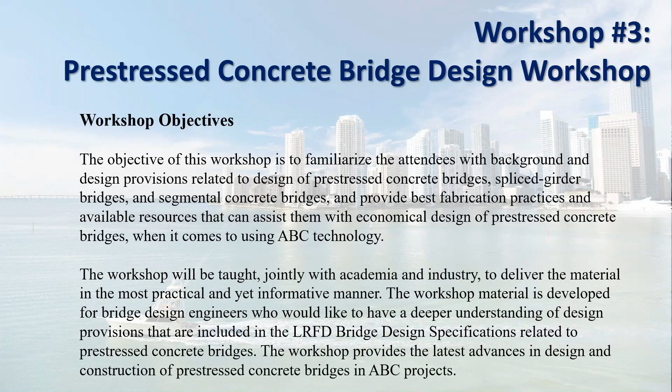As an example, the pre-stressed concrete bridge design workshop has four different sections. The analysis and design, Dr. Bijan Khaleghi will cover in detail the AASHTO LRFD bridge design specification related to pre-stressed concrete design. We will have William Nickas covering the fabrication of the pre-stressed concrete bridge. Gregg Freeby is going to be discussing segmental bridge design and construction, and then there will also be a module on available analysis tools.

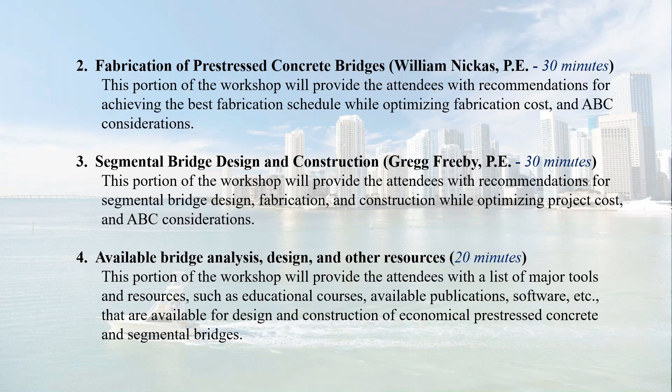So far, we have about 40 exhibitors in the conference, but there's still space, so it's a very good opportunity to showcase your products and services to bridge owners, consultants, and attendees. If you are thinking about exhibiting, there are still booths available. You can go to our website and reserve your booth. We hope to see many of you in December in Miami, Florida. The conference will be held at the Hyatt Regency Hotel.

Our presentation today features the Alaska Department of Transportation and Public Facilities' use of ABC to address climate change on behalf of a remote village north of the Arctic Circle. We'd like to thank Rich Pratt, former Chief Bridge Engineer with the Alaska DOT&PF, for coordinating this presentation. We're pleased to welcome our presenters, Elmer Marx, Acting Chief Bridge Engineer with the Alaska DOT&PF, and Nicholas Murray, Bridge Engineer also with the Alaska DOT&PF. I'd also like to introduce our Q&A session moderators, Paul Liles, formerly Georgia State Bridge Engineer, and Don Diggeman, current Georgia State Bridge Engineer. We'll now begin our featured presentation.

Thank you, Mary Lou, and welcome everyone from across the nation. You have to admit, it's pretty cool that Atarod is in Miami and Nick and I are here in Juneau, Alaska, the other side of the country. So, modern technology at work. Thanks for that.

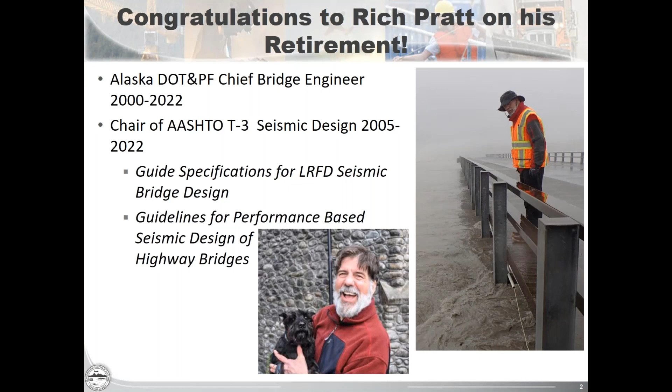I'll start today by speaking sort of globally about Alaska's use of ABC.

Consequently, Alaska has sort of been using ABC since before it was called ABC, before it was cool like it is now. The reason is these remote locations are difficult to access. Many have no road access, so we either need to fly in the pieces, barge in the pieces, or use ice roads in the winter to transport the pieces. That's pretty challenging. Further, our winter months are pretty long. In Alaska, they say our seasons are almost winter, winter, still winter, and construction.

So that doesn't leave us much time to work. We don't have a lot of warm weather. Plus, in Alaska, the daylight hours get very short in the winter months and much longer in the summer. Oftentimes our construction season is limited to between 3 and 5 months to get a bridge built, and we prefer to have our bridges built in that single construction season.

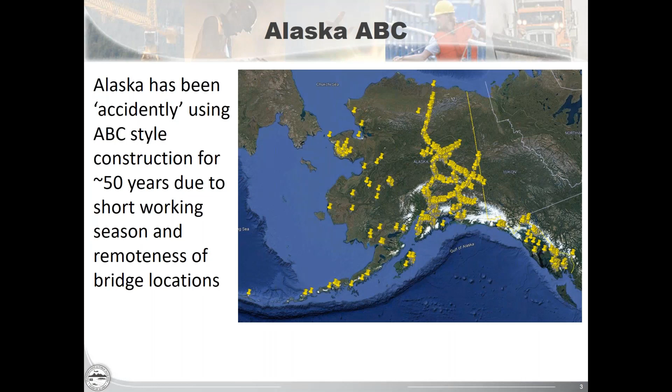One of the most popular superstructure types we use in Alaska is the decked bulb T. We've been using that structure type since about 1973, and it represents a pretty large part of our inventory at this time—our deck bulb T girder bridges are used throughout the state. For us, they are the low-cost solution. If you can get a deck bulb T to work at your site, if it meets the geometric requirements and so forth, it will almost certainly be the least expensive option.

For our substructure, a very common system for us is concrete-filled steel pipe pile extension bents. That's quite a mouthful, but they're just concrete-filled steel pipes that support a cast-in-place or mostly cast-in-place concrete cap beam, which in turn supports pre-stressed girders or structural steel girders or other superstructure types. These are galvanized steel pipes, galvanized from the top of the pipe to 10 feet below the final ground line. That's to address corrosion—once you get about 10 feet below that final ground line, there's a lack of oxygen, so corrosion is pretty much cut off.

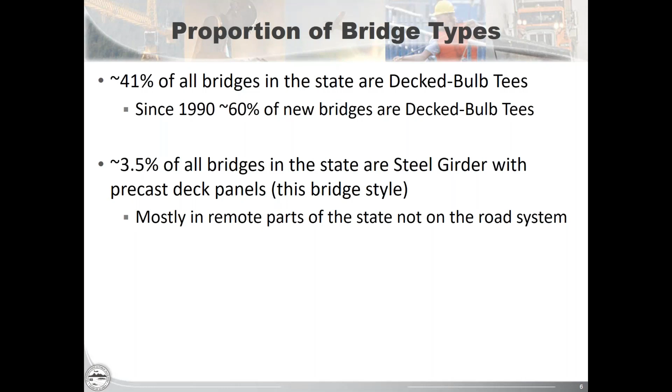So the bridge that Nick is going to talk to you about next has no road access. You can fly in a small plane, though it doesn't have 747 capability. Or you can barge in, barging out of Nome, the closest community. With that, I'll introduce Nick Murray, an engineer with us here at the Alaska DOT Bridge Office. He's been with us over 10 years, maybe 11 or 12 even, and has done a lot of our more challenging work. So with that, Nick, it's over to you.

Because it's on the ocean, the temperatures are not quite as extreme as you'd expect - it's kind of regulated by that. That being said, there are still very low lows, but in general it hovers right around or just below freezing. Something else to point out is that this area has been inhabited for about 1,500 years or so.

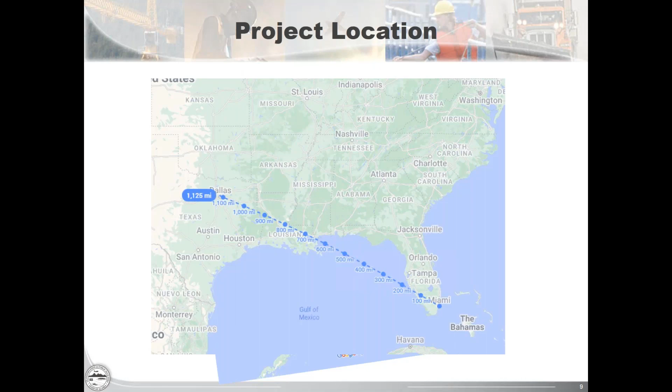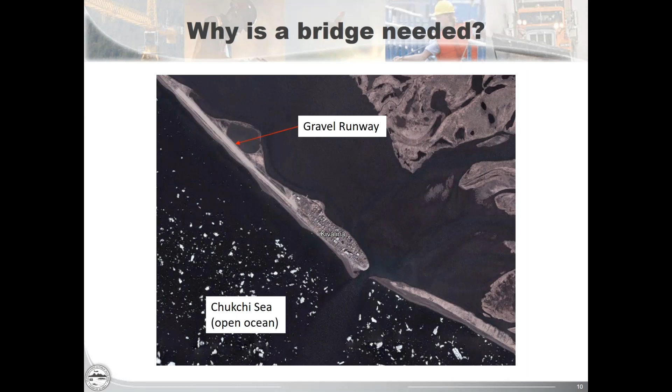If I zoom in a little more, this is the entirety of the town - there's no suburbs to this, it is it. Every person you see lives in town, and you can kind of get a sneak peek of where this is going. If you look around here, this entire southern east portion of the island is armored. That was a U.S. Army Corps project that went on in the early 2010s.

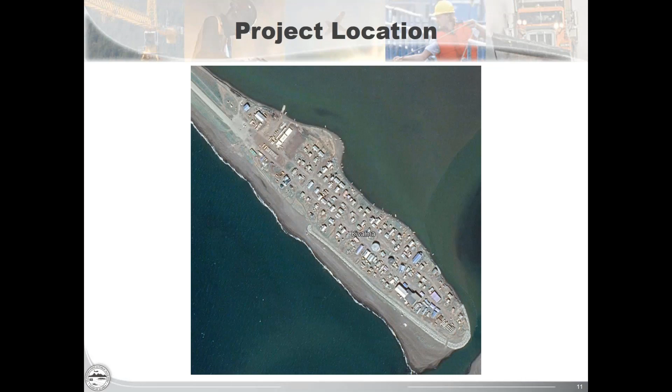So why is a bridge needed, and where is a bridge going? The villages up in this part of the area are protected by the sea ice. I know that seems counterintuitive, but the sea ice provides a big damper to any storms that come in from the Arctic Ocean and the Western Pacific, typhoons in particular. As sea levels have risen and temperatures have increased, that sea ice is becoming less and less reliable.

It's showing up later in the year and dispersing earlier in the year, so even compared to a few decades ago, that sea ice is not providing the buffer that traditionally had been there. You look at this picture and think, oh, that's a lot of sea ice, but this is in June. Traditionally there would only be open ocean for maybe two months of the year that Kivalina was actually exposed to open ocean, and the rest of the time it's protected by it.

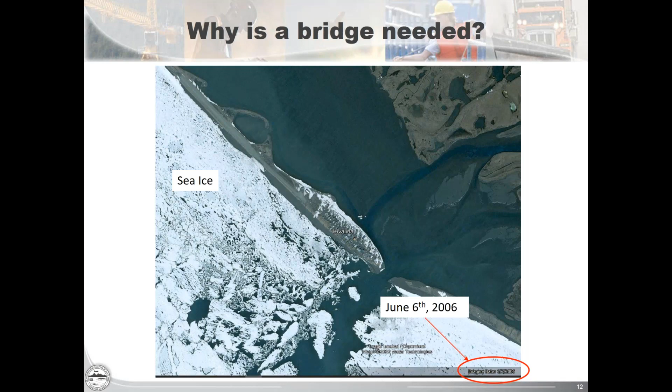If I take one step further back, what you'll see is that it's not just a little bit of sea ice. There's approximately 50 to 100 miles of sea ice between open ocean and the village, which gives you some sense of just how much protection that is. When it freezes 10, 15 feet thick, it's acting essentially like another landmass protecting the village.

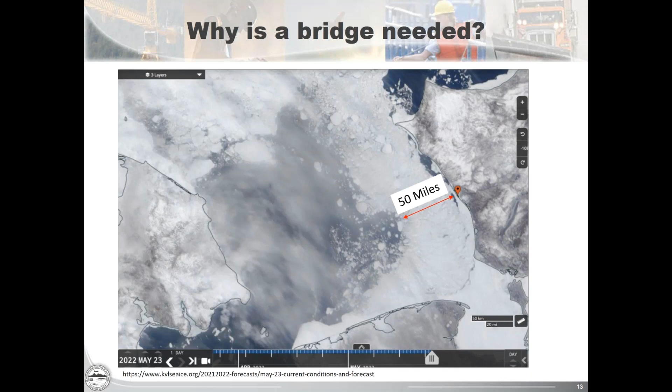One other thing I'll point out is that these two islands down here are the Diomede Islands, so yes, you can see Russia from parts of the US.

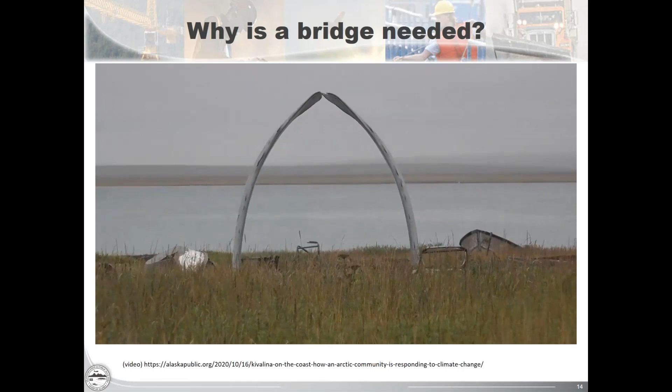This basically points out that large portions of the beach have been lost in recent years. You can see there's no trees in the area, and the sea ice you can see is broken up and not as firm as it would have been.

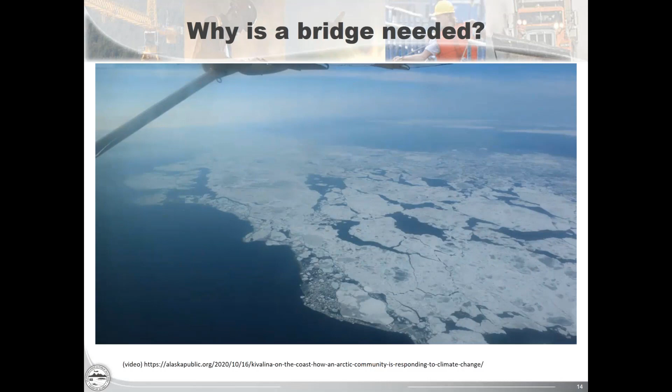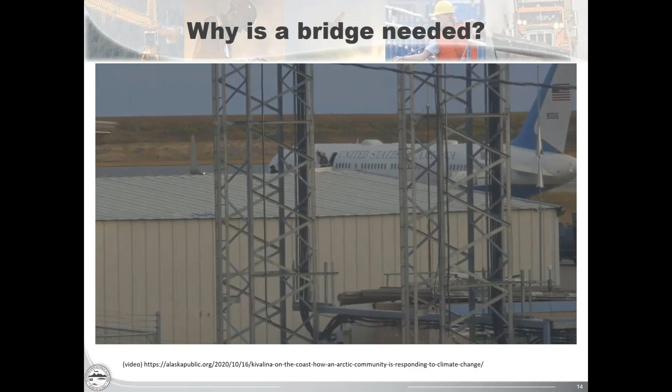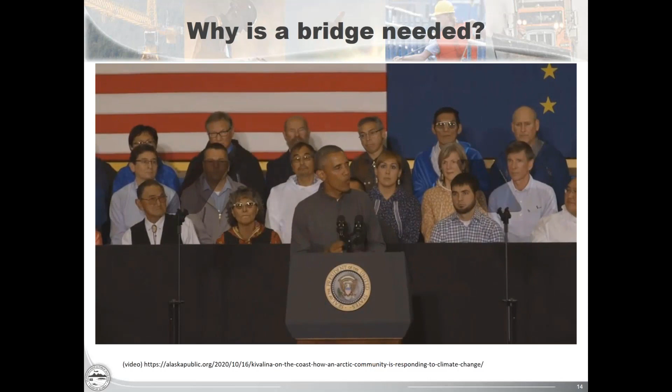A kind of unique fact is that about eight years ago, President Obama became the first sitting president to visit the Arctic, and he actually flew over the village of Kivalina in Air Force One. It's kind of a big deal for a village of only 450 some odd people, and he pledged $2 million to support voluntary relocation efforts.

That's the former governor he's speaking with right there. They estimate, though, that we'll need about 100 times that much to relocate these villages.

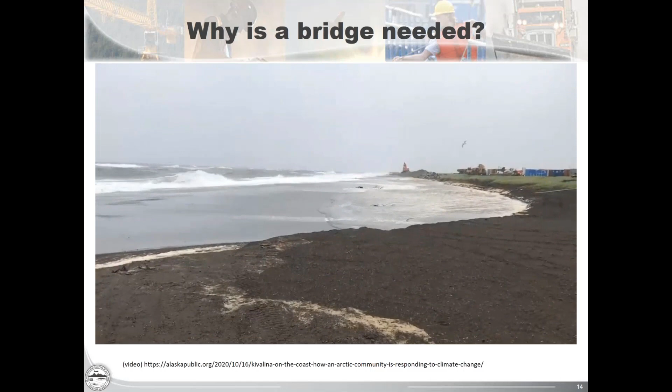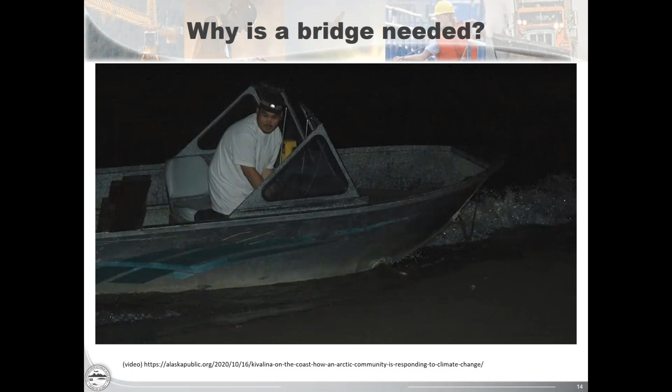In 2007, there was another big storm that came through, and you can see they're trying to quickly armor it. Because the village is so low-lying, half the community ended up having to evacuate. The young children and the elders were able to fly out, but a lot of the other people just had to take small boats across to the mainland. If you look back at those pictures I showed earlier, there's not a town on the other side, so they're just kind of going to open land.

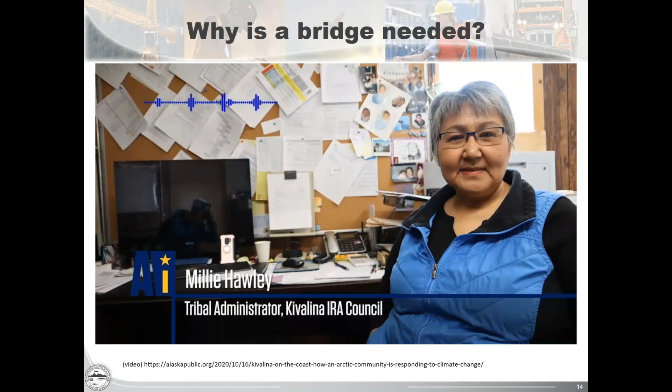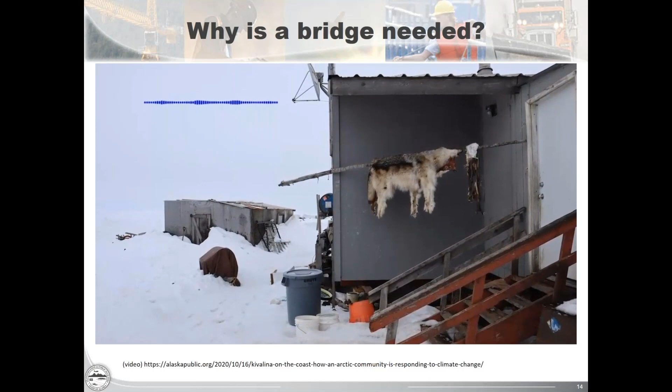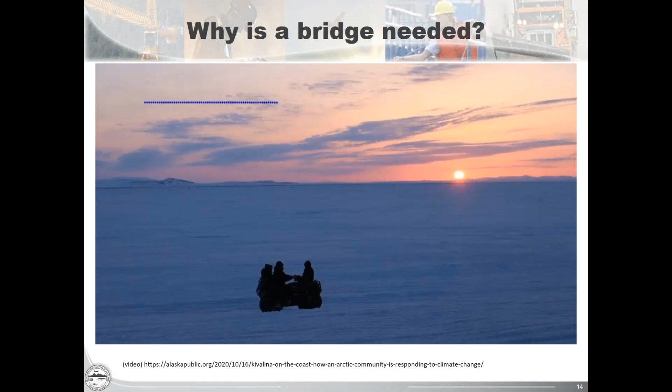It's a big part of cultural identity that this area has been inhabited for a very long time, and this village in particular has been inhabited for over 100 years before Alaska was even a state. So the cultural identity of the community is very much tied to this location and a subsistence living. There have been pushes to essentially make these people move to other villages, but it comes with a huge cultural and societal cost.

The delivery method for this project was chosen as a CMGC project, or Construction Manager General Contractor. I'll speak to the reason why in a minute, but we issued an RFP as DOT, the owner, and selected a contractor being brought on board prior to the design being finalized. Something a little unique about us is that DOT internally still performed the majority of the roadway design work, and we performed all the bridge design work. There were some specialty consultants brought in to do coastal engineering and those sorts of things, but we did the majority of the design work in-house.

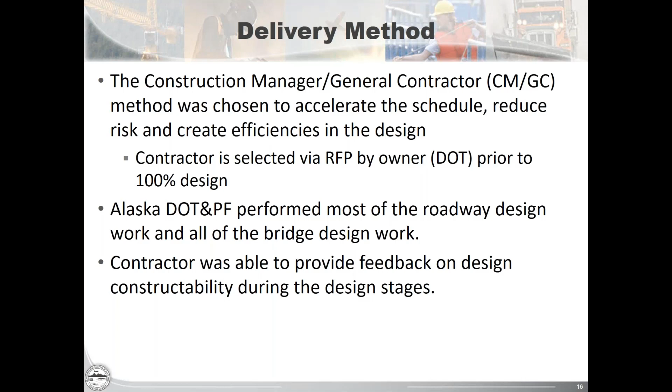Important to us is that the contractor was able to look at those partial design plans and give us feedback on optimum ways they thought they could build something, or if they thought something was going to be better, faster, cheaper, we could incorporate that prior to it going out to construction, or if they saw potential risk in items.

So we've been using CMGC for, I want to say, maybe the last 7 or 8 years now. We've had a positive experience with it. It allows us to collaborate with the contractor, but still allows them to propose new ideas and efficiencies. At the same time, as the owner, it allows us the opportunity to steer those decisions as the long-term owner. For us, it provides more control to the owner than a design build project, where it sort of becomes hands-off and you let everything go.

Like I mentioned, it provides for the contractor's construction methods and special details they want. For this project in particular, an example is they wanted to be able to drive their unloaded off-road dump trucks across the bridge. Not something we would have normally evaluated, but during the design process, we said sure, we can look at those trucks and make sure the bridge can handle those loads.

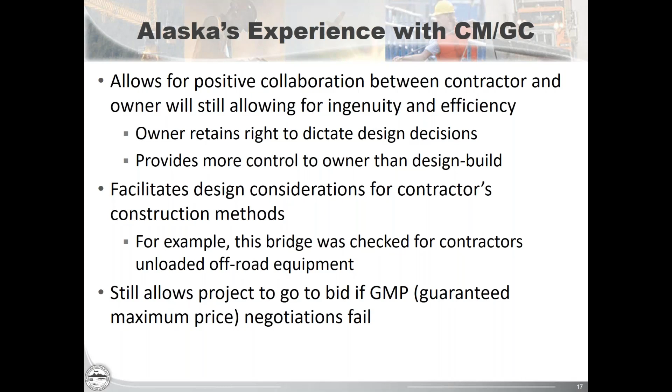That are not described by AASHTO. One of the more important things, I think, that's overlooked is that since the contractor is brought on before the project goes to construction, if there's a disagreement or negotiations fail on the guaranteed maximum price, we can still turn around and issue that project as a regular design bid build at that point, essentially, and bring on another contractor through traditional contracting means. So that gives us quite a bit of flexibility up until that point.

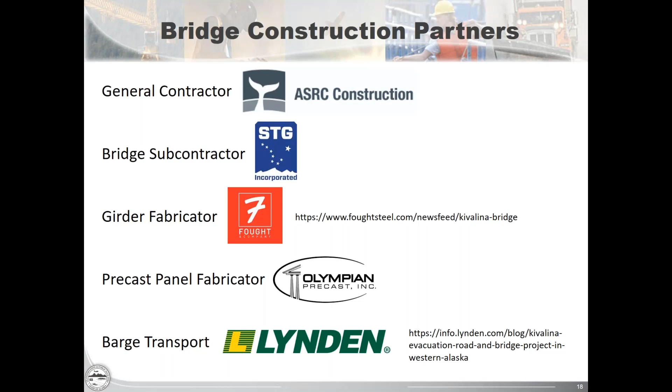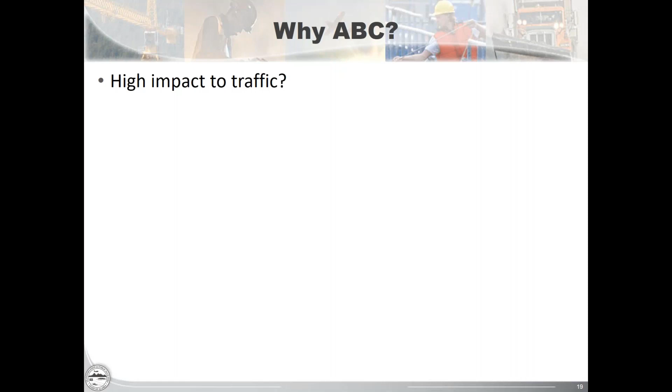So why are we using ABC on this project? A lot of times, states or projects will say the impact to traffic is just too great, we need a really quick project. I think the project highlighted in last month's webinar had an ADT of 220,000 or something, just astronomical. You could probably guess from the picture on that map that our ADT is not quite 220,000 - in fact, it's about 18. And since it's a one-way bridge that doesn't really go anywhere, it's really about 9 trips total. So not really an impact for us.

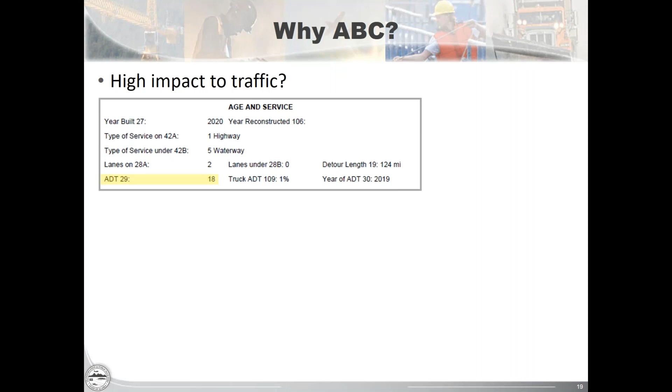The reduced construction time - this project occurred sort of in the middle of the first year of COVID and all sorts of other issues that came with that, so it still became a 2-year project. That includes the entire road, obviously - building 8 miles of road from scratch. We've estimated that, based on what we looked at, if the bridge was built in one straight shot, it would have roughly been about 3 months to build. But the bridge was not necessarily a critical path item for the project as a whole, so they kind of started and stopped to move to other things.

So the real reason we used ABC is that it's such a remote location. Getting equipment, laborers, and materials to the site is just a logistical nightmare. A lot of times, equipment that goes to that site will be mobilized once and brought back when the entire project is done. So minimizing the duration of construction time is important to minimize some of those mobilization and demobilization costs.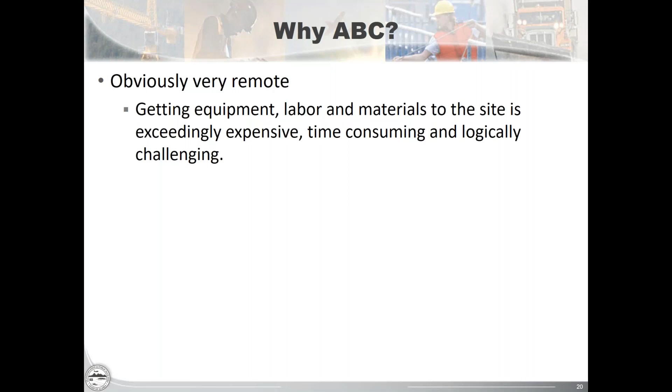The other thing we try to do with our style of ABC is minimize specialized details or equipment. Post-tensioning is a good example - for most states it may seem routine, but for us it's pretty specialized in the end, and requires some specialized equipment. Avoiding details like that can't be done with regular general contractors is important, because it just increases the cost and increases the likelihood of scheduling issues and those sorts of things.

Cast-in-place concrete is exceedingly expensive. Obviously there's no batch plant in town, so all of the aggregates, cements, and those sorts of things have to be brought in to site and mixed. And then because it's being mixed in a temporary batch plant, quality control can sometimes be a little iffy. So we want to maximize our use of precast elements.

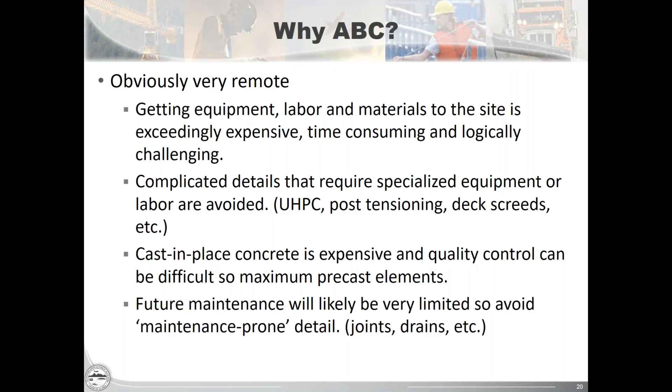Additionally, because it's such a remote location, future maintenance will likely be very limited, or more or less negligible. So we want to avoid any details that are typically maintenance-prone - joints, drains, bearings, those sorts of things. Any of those we can eliminate will help the bridge maintain a longer life. And then finally, as Elmer mentioned, weather and daylight considerations can drive the schedule, especially in Alaska, where you have a short working window.

With all that sea ice, there's only certain times a year you can bring equipment in and out of the site, so it really drives the schedule.

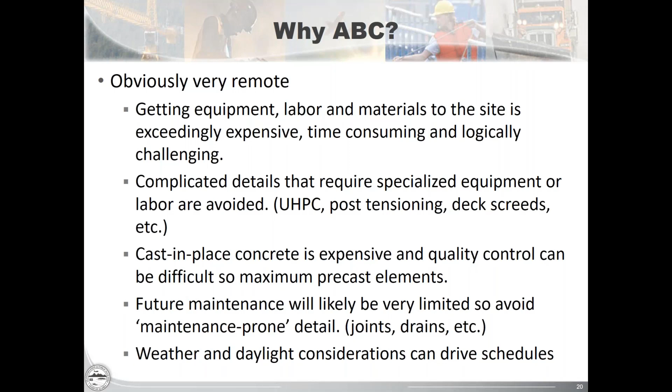In terms of the actual bridge, first start of any project is we had to go do foundation drilling. This occurred in April of 2018. We mobilized a small drill rig up there, a contractor. Kind of unique is that they have to access the site using snow machines.

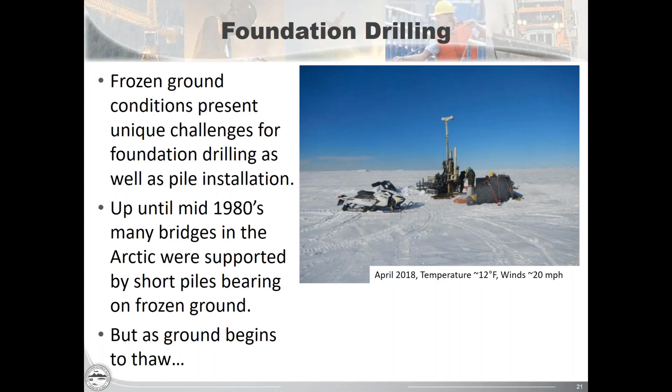What's interesting goes back to climate change and thawing ground conditions up here, is that when there's frozen ground, it looks like really great soil. You get great end bearing resistance. So we have a fair number of bridges supported on frozen ground with very short piles. You drive a pile and you essentially get infinite bearing capacity on ice. But once that ground begins to thaw, your piles start to sink.

This is a picture of a bridge down in Nome, just a little bit south of this project, supported on piles. This isn't a spread footing that's sinking. If you go back to the original pile driving logs from the 70s, they were only driven to a shallow elevation. You can see we're right at the ocean, so those piles are probably only 30 feet long or so. One corner of the bridge has now settled 2.5 feet, and that's true pile settlement.

Like all settlement, if it had all happened uniformly, it probably wouldn't be that big a deal, but it never seems to happen that way. One side's going to settle more than the other and starts to tear the bridge apart.

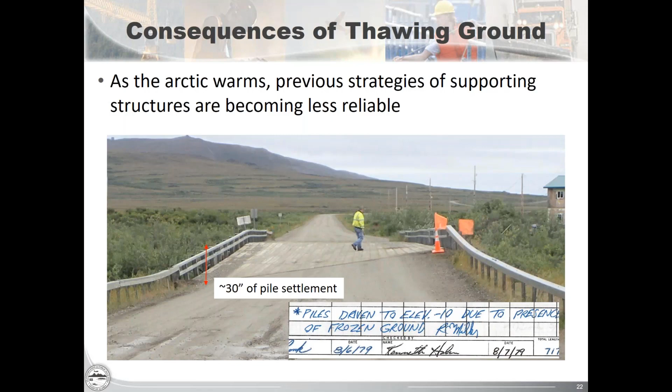So an important part of our foundation investigation is to actually measure those ground temperatures over a period of time. They installed thermistors along the boreholes. This red line represents 32 degrees, the standard freezing point. Anything to the right of that line indicates that ground is thawed; anything to the left indicates the ground is still frozen.

But a mitigating factor at this site is because it's not really fresh water, it's mixed with salt water, and salt water freezes at a lower temperature. So that apparent thawed condition is quite a bit less than you would initially think.

Just a few other facts I touched on real quick: SPT testing in frozen soil isn't particularly helpful because that soil gives you such high N values it doesn't provide a whole lot of useful information. So what you have to do is predict what the thawed condition of that soil will be in 30, 40, 50 years. But just like scour, if we assume there's going to be 15 feet of scour, we have to overdrive our piles. Those piles have to be installed when the ground is currently frozen, so it kind of creates a catch-22 there.

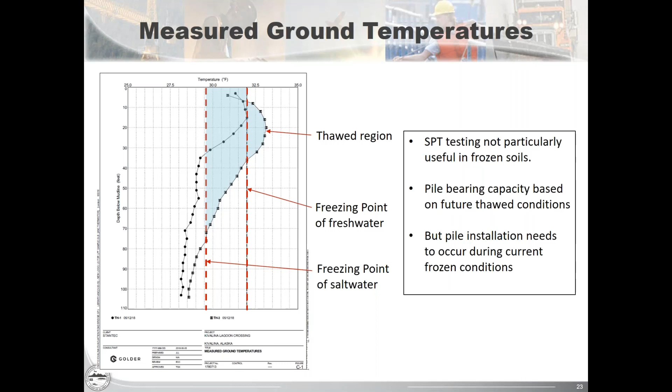So the foundations for this bridge are 2 foot by half-inch wall, approximately 80 feet deep, close-ended steel pipe piles. It's the same detail that Elmer showed in the intro, where they're filled with a reinforced concrete core down to a certain depth. Then there's a gap region at the top where that steel shell stops, and that essentially allows us to dictate where that plastic hinge is going to form during a design level event.

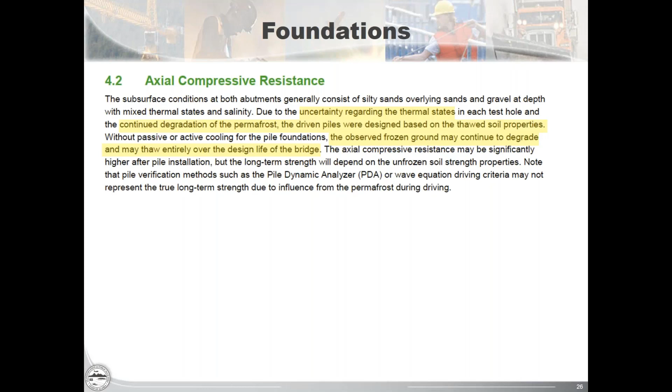As I mentioned from the foundation engineering report, we're essentially going to assume that ground will thaw over the life of the bridge, based on climate models and the uncertainty of how fast things are changing. So, to get through that frozen ground, we essentially dictated that the contractor pre-drill through 3/4 to 90% of that final pile diameter down roughly to tip, and then they could advance the piles through those loose cuttings.

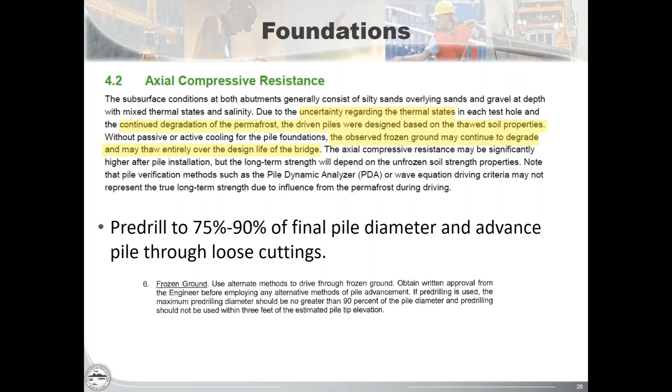The contractor elected to use cast in place cap beams anyway. There was already cast in place concrete on the project, and there's some risk tied with precast cap beams for alignment and getting things shipped up there in particular.

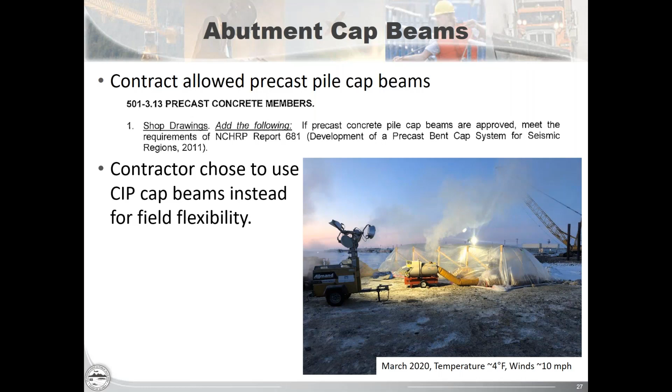On the bottom right, you'll see a picture of the cap beams being cast in March, so still very cold. They're obviously in heated enclosures, and Alaska, as part of our contract, requires cold weather protection whenever the air temperature is less than 40 degrees. Ironically, the hard part is sometimes getting that maximum temperature below 90 — it's really easy to accidentally cook the concrete.

The cast in place concrete for this project came pre-assembled in super sacks — a pre-mixed package of coarse and fine aggregate and a pre-mixed package of cement — and it was literally mixed in the back of a standard 10-yard mixer.

On the right, during one of the concrete curing periods, there was an unexpected windstorm that came up and started blowing around the enclosure. So they're actually using the arm on this telehandler to keep the tent in place.

The superstructure for this bridge is steel plate girders. The total length is about 186 feet, with 2 field splices in each one, again just to minimize shipping. The longest segment you're seeing on screen is about 104 feet, and the others are roughly 40. The shear connectors were shop welded to avoid field welding.

It's not a super specialty item to field weld, but anything we can do to minimize QA, QC, preheats, and anything like that in the shop, the better.

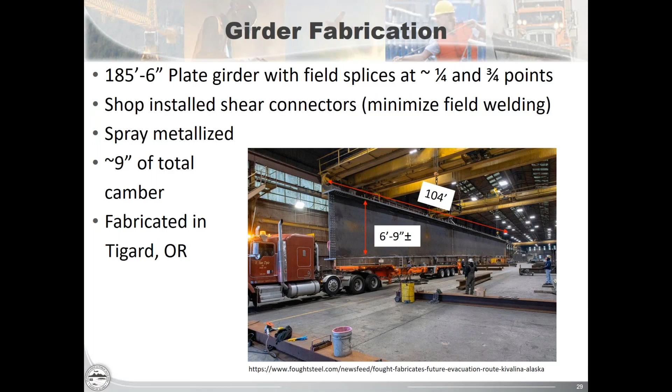The girders all ended up being spray metallized — obviously not in this picture, it was on its way to the spray metallizer. These came out of Oregon; pretty much all of our steel fabricating comes from down south. There was a total of 9 inches of camber along the total length, and these girders are roughly 6 foot 9 inches, just parallel flange.

So how do you get girders from Oregon all the way up to Kivalina? First they take a truck to the Port of Seattle and they're placed on a barge. They follow up the coast of British Columbia through Alaska towards Anchorage, all the way around Unalaska, where Dutch Harbor is — if anybody watches Deadliest Catch. Then, like Elmer mentioned, they make it to Nome where they're offloaded and put on a landing craft. In total, there's about 3,000 miles of barge transport just to get those girders up here.

So it's pretty important that they have a durable coating, because oftentimes what we'll find is, when something's been painted or hot-dip galvanized, sitting 3,000 miles on open ocean, by the time it gets to the site it looks like it's already 20 years old.

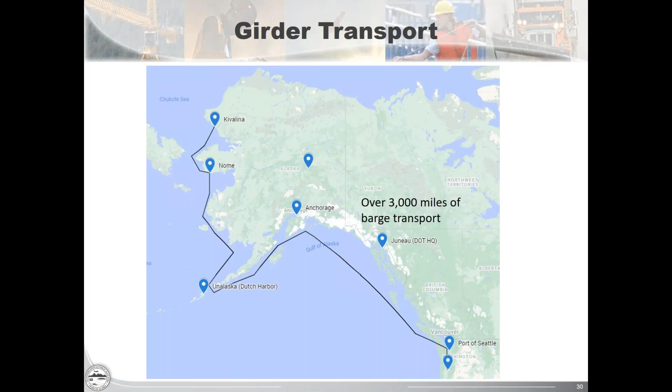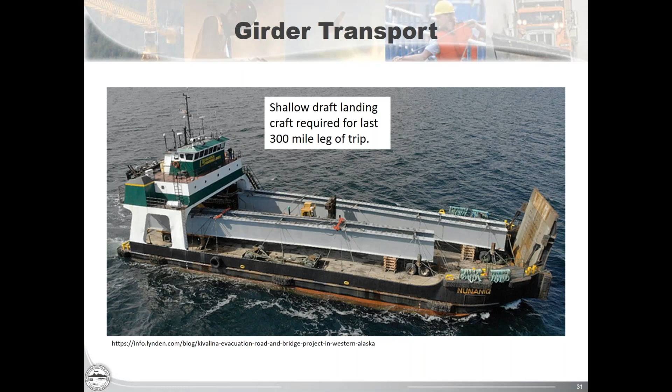If you notice from the pictures in the intro of the village itself, there's obviously no dock facilities. So the girders themselves were loaded onto a landing craft for the last 300-mile leg of that journey. You can see from this picture that's not all the portions of the girder, so it required multiple 600-mile round trips. Once they reached the village, you essentially beached that landing craft, a temporary ramp was built, and the girders were hauled directly off of there.

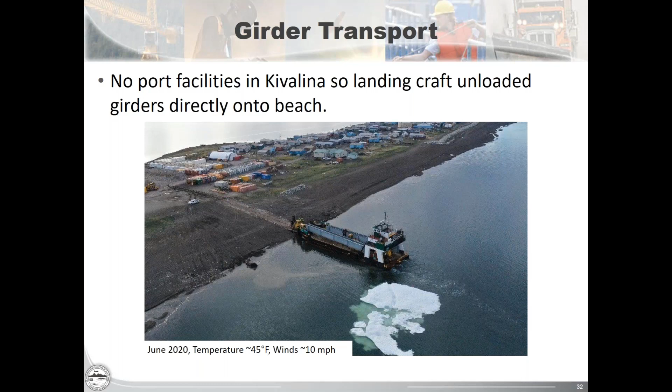The girders were put in place with a crane-assisted launch, so they were fully assembled and spliced on the ground and then launched on an alignment adjacent to the bridge. You can see the substructures sitting here — instead of being launched over the top, they were launched off to the side and then picked up by a crane on each side and set into place. This went pretty smoothly; I think they got all of these set in a day or two.

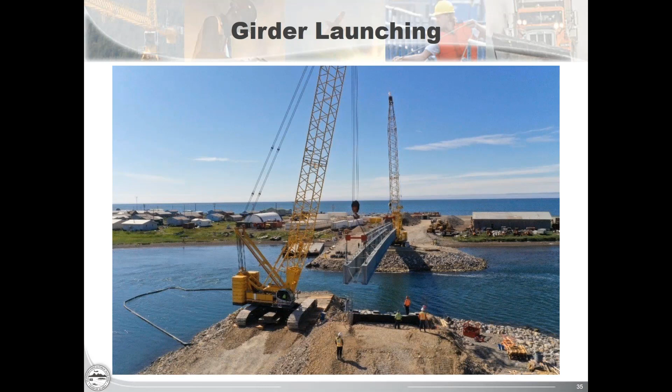Probably the biggest ABC component of our project is our precast full-depth deck panels. They're the entire width of the bridge — in this case 27 feet 4 inches — but relatively narrow in length direction. That's partially to keep the weight down and also to allow them to be shipped economically.

I'll point out a couple of details: there are blockouts for the shear connectors that'll line up with the shear connectors on the girders. So this assembles like a big Lego set, and all those voids will be grouted back after the fact.

Above each of the girders, there are 2 sets of leveling screws that allow the haunch to be varied to account for camber or create a nice smooth riding surface. There are also 4 sets of lifting points that the contractor uses to lift or bunk those panels with either a crane or a forklift.

Because it's full depth, the crown of the roadway is actually cast in, so there's no cast in place topping above this. The deck becomes the riding surface, and as such there's a little bit of extra clear cover on top since there's no future wearing surface, so we discount a portion of that for sacrificial loss.

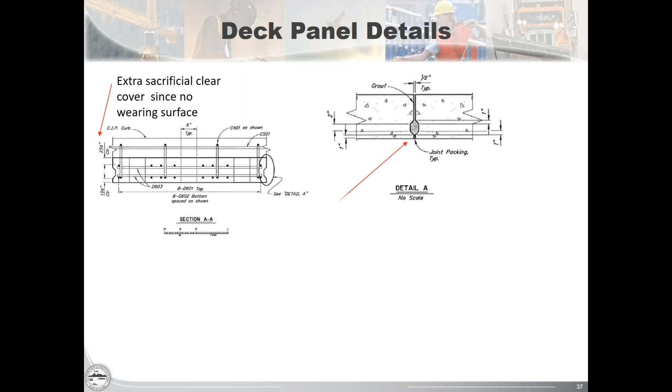The keyway joints are very simple. There's no longitudinal or transverse post tensioning, and it's not UHPC, just a standard 9,000 PSI prepackaged grout. Here's a quick detail of those leveling screws that allow the haunch to be adjusted as needed.

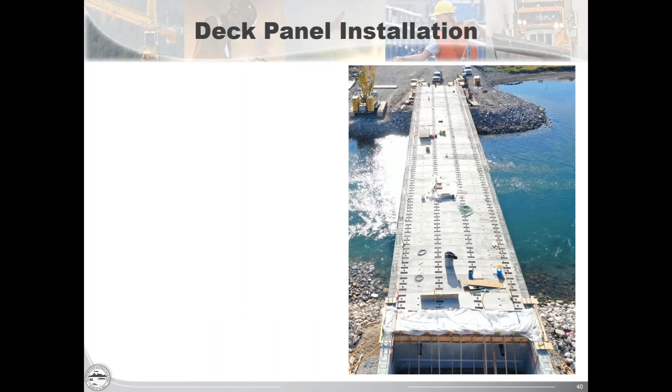This picture shows them fully assembled and placed but not grouted. A big benefit of deck panel installation is that it goes extremely quick, because all the panels are identical. The only difference is some have rail post anchors and some don't. Otherwise they're identical, so you can spin them 180 degrees since there's no directionality, making it quick to get those in.

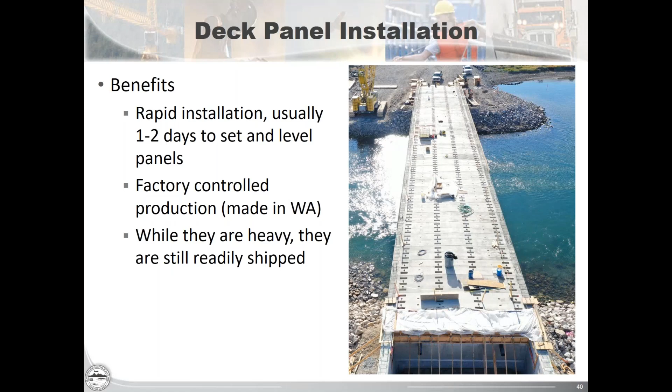Because they're produced in a precast yard, these panels were made down in Washington, you can achieve much tighter tolerances, more repeatability, and generally higher strength concrete, alleviating a lot of the issues with cast in place concrete. While they are still heavy, the nice thing is they're narrow enough to fit on the back of a regular truck or into a regular shipping container footprint, so they're still easy to move around.

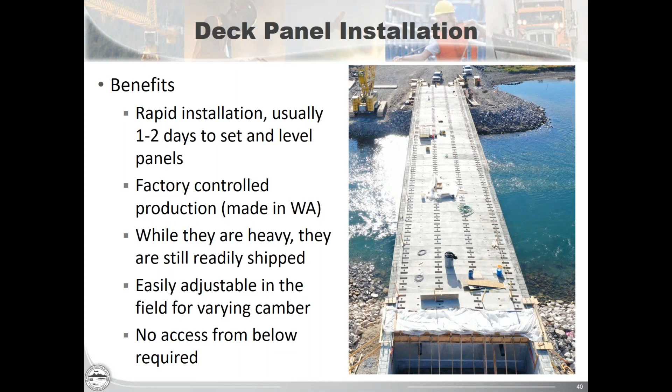Because of the girder adjustment leveling screws I mentioned, you can account for varying camber, or if your girders don't come out exactly the same, you can fix everything. A big thing for us is that no access from below is generally required. The leveling can be done from the top, all the grouting can be done from the top, eliminating the need for false work, scaffolding, or any access from below.

For the end diaphragms of this bridge, once all the deck panels are in place, we were able to go with a jointless bridge, so there's no expansion joint at the end. The expansion takes place between the approach fill and the end diaphragm, which is locked into the girders. Because of that, there are no exposed sole plates or bearings. These use a traditional reinforced elastomeric bearing pad hidden under the girder, and the rest, the free end allowing for expansion, contraction, and rotation, is all foam.

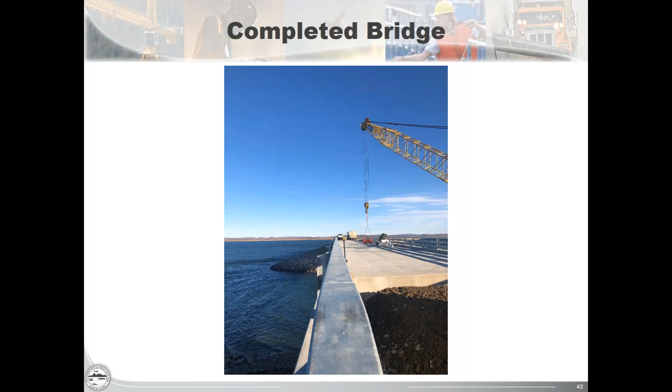And then a nice finished elevation. We're pretty happy with how this bridge turned out for being in such a remote location. So real quickly, I'll throw out some of the materials we used. I've mentioned some of them.

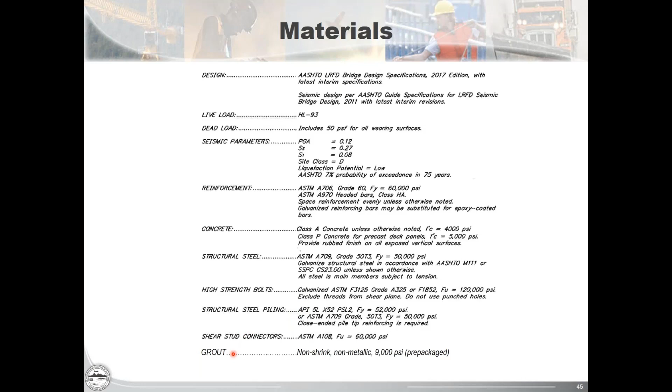The cast-in-place concrete was just a regular Class A 4000. The deck panels were a little bit higher, 5,000 PSI. Structural steel, we used predominantly A709 grade 50 T3 — that T3 represents a Charpy test at a temperature zone of 3, which is about -10 degrees, 50,000 PSI. The structural steel piling is A709 grade 50 T3 again, or API 5L X52 PSL2, which is American Petroleum Institute — essentially oil pipeline pipe. And then the grout is just a standard 9,000 PSI prepackaged.

So the big question everyone wants to ask is, this looks really cool, but how expensive is it? I'm going to go through some of the costs. Because it was a CMGC, there's not true bid prices to compare, but we have information from other projects like this. So I'll first show what we'd expect normally on an urban project, say in Anchorage or Fairbanks, and then what this project was, to give you a flavor of it.

Traditionally we're looking at somewhere on the order of $1,500 a cubic yard for cast-in-place Class A concrete. This project came in at roughly $6,000 a cubic yard, so about a factor of 4. So minimizing the amount of concrete is obviously important. Reinforcing steel, same sort of deal, about a factor of 4.

Structural steel, not quite as much more expensive — some of this is tied up in mobilization/demobilization costs. But structural steel prices have been so fluctuating lately that it's hard to find a common number to compare. Same thing with pile — we've had local pile costs go up quite a bit as well. Pile driving costs are on the order of 3 times as much, and a lot of that has to do with pre-drilling and frozen soil and those sorts of things.

Those deck panels, we're typically only using in remote locations, so we don't have a great urban comparison, but on this project each of those is about $20,000 a piece.

Class 3 riprap, about double. You can probably tell from some of those photos there's not great rock sources, so most of the riprap, if not all of it, is brought in on a barge from some other location, and the transportation costs become quite a bit. Worker meals and lodging for this project were like $2.7 million — they're essentially building a small town for all the contractors and subcontractors, including a camp, showers, bunk beds, recreation, and all those sorts of things. And the mobilization was about $3 million.

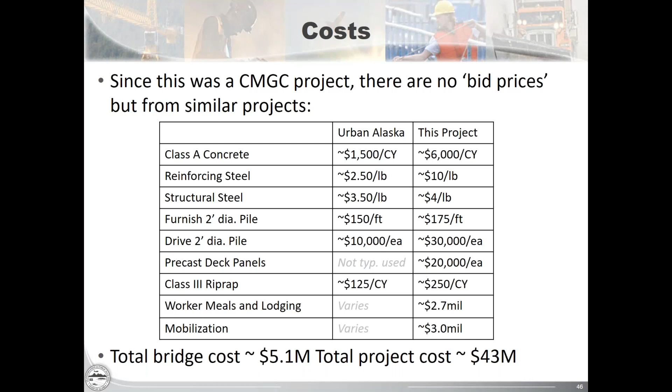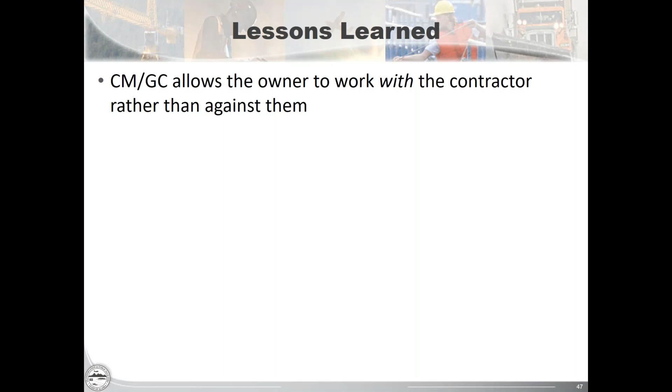So, a couple lessons learned that came out of this project. We really like the CMGC process, which allows us to have a good working relationship with the contractor rather than a contentious one. When you get into the construction phase, if an issue comes up, there's a bit of accountability on both parties because they've all worked on the design prior to construction. Another thing that came out of this is that our own project staff are instrumental in enforcing that contract and making sure we end up with a good project. And it just goes to show that regardless of where you are, you can still have a high quality project.

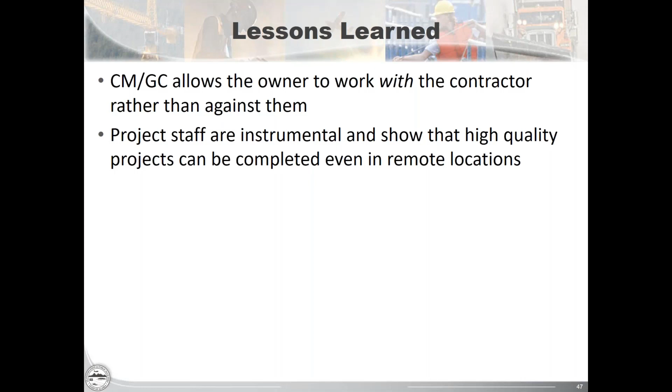One of the other lessons learned is that we had assumed certain things about what the contractor wanted. For instance, precast cap beams — we thought that would be a great opportunity for the contractor, but once they priced it out and looked at the risks, it turned out it wasn't a great option, so they went with the cast-in-place option anyway. So our underlying assumptions and biases are not always correct.

And so in the village of Kivalina, they were ready to evacuate. They were ordered to be ready, but they never ended up having to do it. It kind of went a little south.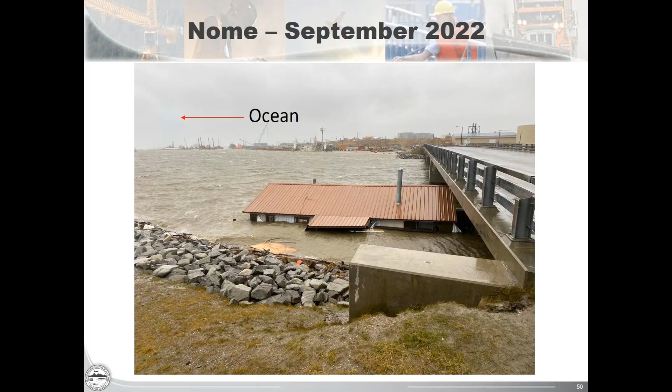Something interesting about this is that the ocean is actually that way. So this is storm surge pushing a building up into the bridge rather than the river pushing something down. It just goes to show the power of the ocean.

You may want to go look at your pile picture. Yeah, so like I said, it was a pre-bore.

So they pre-bored down and then used a regular impact hammer to get those piles into place. I think they used a vibratory hammer to get them down to a certain depth, but we required an impact hammer to verify capacity at the end.

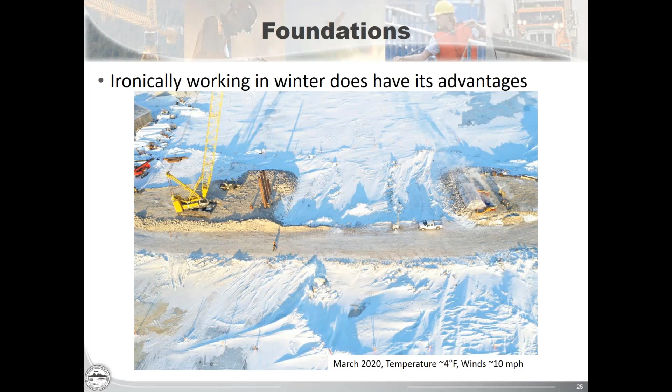Then there was a question about the pile connection to the pier cap, whether it was a moment or pin connection, since there's that little gap in there. So in this region, the cap beams are designed as capacity protected members, meaning they handle the full hinging capacity of the piles themselves. It's more of a moment connection, but the cap beams are designed to handle the full plastic moment, regardless of what the design forces could be.

Then there were a few questions about temperature. The first was what was the minimum temperature for placing concrete in the precast deck pockets around the shear connectors. It all goes back to 40 degrees, and rising, during the entire cure period. That's for grout and Class A concrete and any cast in place concrete.

Then there was a question about which material was used for the cast in place in situ joints. That's just a normal prepackaged grout, 9,000 psi, non-shrink, non-metallic, nothing special. It's meant to be as straightforward and easy as possible, so the only thing you have to do is add water at the correct ratio and mix it.

The question also asked about the temperature again, which was 40 degrees and rising, and when these joints were cast. I guess there are two parts - it was in the summertime. Most of the joint work was done in September, with temperatures just above that 40 degree point. There's a little bit of wind, and we require a wet cure, so burlap or something to keep those joints wet for the specified curing period.

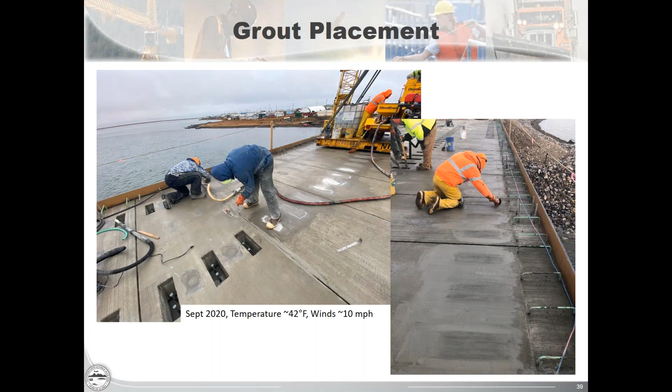We had a question from earlier, maybe on the first picture showing the deck bulb tees in Elmer's presentation. It asked what is used for ride quality on these systems, since the picture showed an asphalt overlay. Yeah, most of them in urban areas will have an asphalt overlay. What's important is that because you don't have a chance to do a cast in place deck to fix any issues, there's a fit tolerance between these girders - roughly 1/2 inch vertical difference allowed at midspan, and 1/4 inch at the ends of the girders, with whatever remains usually taken up by the asphalt. We do have locations where they're just driven on bare deck, not an asphalt surface, usually on more remote gravel roads.

The question also asked whether there are any problems with skews causing misalignment of the girders. It can become a challenge.

This bridge in this picture is on about a 35-degree skew, if I remember correctly. So obviously at the ends you end up with a little bit of differential, and you're sort of looking for the best fit you can, recognizing it's not going to be perfect.

And then on the asphalt overlays, do you have any issues with delaminations and or spalling with the freeze-thaw cycles up there? I guess our extent of asphalt expertise is usually pointing to it with an arrow and saying asphalt. I know we have some asphalt specialists in the state who work on special designs with a denser, less porous mix that allows less water to penetrate. But in general, we don't have much of a problem with freeze-thaw on our bridges and asphalt spalling.

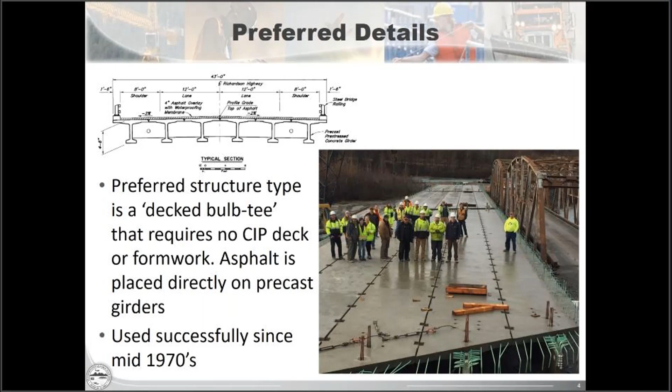There was a question here regarding the precast panels - I guess you do not have to worry about when the web is plumbed, this is for the steel girders. You can plumb them either with just the dead load of the girder, or you can plumb them with the dead load when the panels are on them. I don't know which method y'all use - could you elaborate on that?

Yeah, because those leveling screws are independent on each girder, if the girders don't sit exactly plumb and level with each other, there's an opportunity to adjust them independently. And because that crown is cast in, these abutments are actually level - there's not a stepped abutment. All of the cross slope is taken care of in these deck panels, so the girders all sit at the same elevation, if that makes sense. And they're all plumb - I mean, a 90-degree bridge. Yeah, correct, I think that's pretty good.

There was a question that came in beforehand about what was the biggest challenge for such cold weather. I'm sure just working in it in general - your production rates slow down, equipment has to be warmed up and kept running. A lot of times on these remote sites where it's really cold, the pieces of equipment will run 24 hours a day because if they shut down, your engines can start to freeze over. So just the general working conditions and getting equipment and contractors on site - you saw that runway, they're coming in on 4 or 5 person planes, and those contractors and laborers are sort of living in this Arctic wilderness almost for many months at a time. So just the general working in the cold - I don't think there were any specific issues. Most of our contractors are pretty well versed at working in cold weather, so cold weather concrete is not an unheard item for them. It's pretty much a standard practice at the beginning and the ends of our construction season.

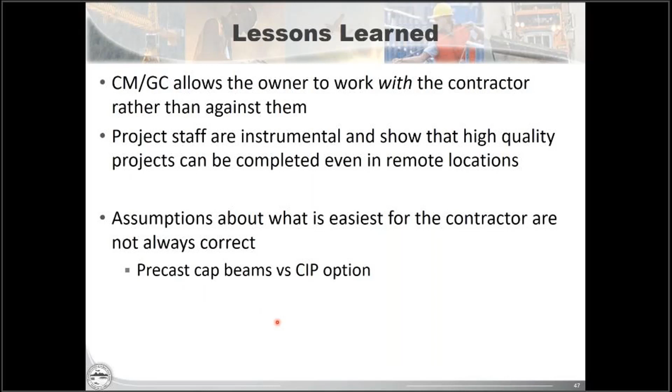I'll give my answer, and then maybe Elmer will step in. We've traditionally designed these bridges to act non-composite because there's not continuous reinforcing across for service limit states. At the strength limit state, we assume that those keyways, any shrinkage cracks in that transverse grout, will close up, and you'll be able to transfer force through there. So I think yes, they are designed, maybe not explicitly, to handle those differential deflections between panels. Because there's a fully grouted haunch underneath, in that regard, they're going to act more or less like a cast-in-place deck.

I'll add a bit—we've been using these precast deck planks predominantly as replacement for timber decks that were used in the 70s and 80s. The biggest application is what we call the Dalton Highway, from Fairbanks, Alaska to Prudhoe Bay, the main oil route. It's an industrial route with heavy truck traffic, and these same panels have performed well on a heavily loaded industrial route. So we're really not worried about them on a remote village route where probably the heaviest piece of equipment, like Nick mentioned, is a grader, maybe the construction equipment that built the bridge. After that, there are perhaps small pickup trucks and four-wheelers, ATVs, we call them—pretty light loads. But we've had good success with this detail on, I don't know what percentage of bridges have them, maybe 5% of our bridges, and most of the bridges on this Dalton Highway. So anecdotal evidence that they perform well.

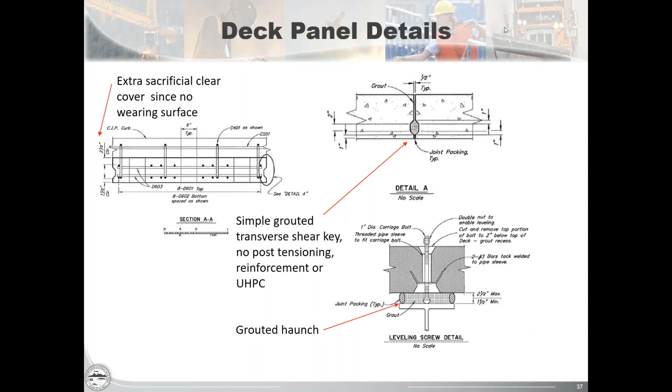Okay, a couple questions about the pile connections. You talk about plastic hinge at the junction between the pile and the pile cap due to the size of the structure, limited mass, and structure not being stiff. Was it necessary to consider the hinging instead of performing an elastic design of the structure?

There were a lot of words in there, but I'll essentially go back and say that the cap beams are designed for the full overstrength plastic hinging of that pile section without the shell on it, and that's why we create that gap in there. So we're essentially forcing that hinge to form, and then the cap beam is designed to take that entire overstrength plastic hinging force, in accordance with the AASHTO guide specifications for LRFD seismic bridge design.

I'll add a bit there as well, Don. We do design that gap region to accommodate traditional lateral loads—lateral earth pressure, live load surcharge—those types of issues for both strength and service limit states. That defines the amount of reinforcing steel inside the pile itself.

We design pretty much every bridge throughout the state for capacity, following the capacity protection principles. So even though the design of the reinforcing steel might come from other lateral loads, the overstrength plastic hinging forces are the loads that govern the design of the cap beam and up, if that makes sense.

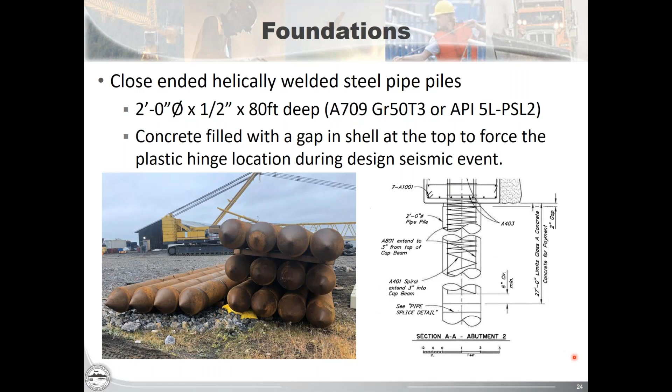That stated, working with researchers and now incorporated into the performance-based seismic design guidelines, we have strain limits that define certain performance objectives of that concrete-filled pipe. One of those is the onset of pipe wall buckling. That's typically speaking a threshold for which we don't want to exceed the below ground response.

That might be an inelastic response, but it's hard, you really can't much inspect inelastic response by itself, but you can see pipe wall buckling. So by limiting our below ground predicted response, or demand if you will, to this onset of pipe wall buckling, we wouldn't anticipate any below ground damage of any real consequence. That said, we can continue our plastic hinge rotations beyond that onset of buckling all the way to pipe wall rupture or fracture, and that's a very significant amount of deformation associated with that.

I'll try to put some guide rails on it. If we had a conventional reinforced concrete column, perhaps we would be good seismically for 1/4 to 1/2 of that column's diameter for seismic deformation capacity, in that range. For these concrete filled pipe walls, yielding might be 1/2 or so of the pipe diameter, and ultimate might be a full pipe diameter or more. It's measured in feet as opposed to inches.

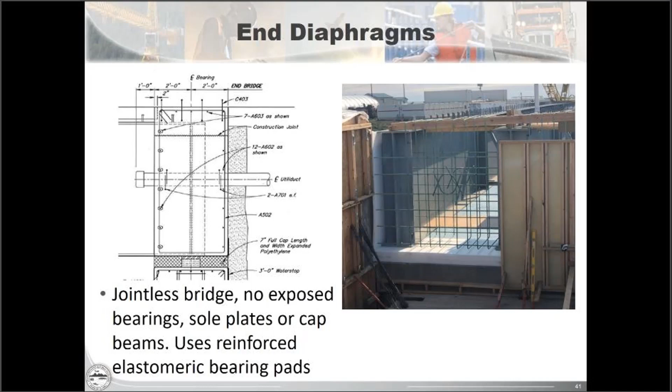Yeah, so there were no precast columns here. The deck panels are essentially designed per LRFD, but that strip width is obviously limited to the panel width, so the panels are designed as if they were a freestanding unit. For instance, these panels are almost 5 feet wide, so it's designed for that total limit. Obviously the reinforcing has to avoid all these holes we've put in it, so there's a little bit of legwork to get those in, but otherwise it's essentially a standard LRFD deck design, just broken up into chunks.

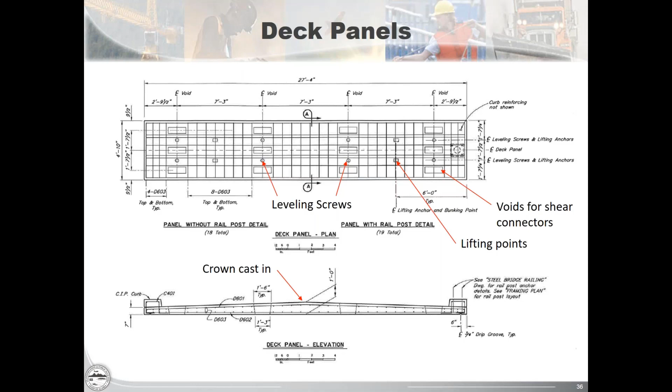Okay, we've got 3 minutes left. Oh, I was going to add, I don't think it governed. I was trying to look through the calcs, but we also have to consider shipping, picking, bunking, that you wouldn't normally look at with a cast in place deck, but that can be a controlling consideration. So we try to set those lifting anchor points at reasonable locations to try to minimize those non-installed load configurations.

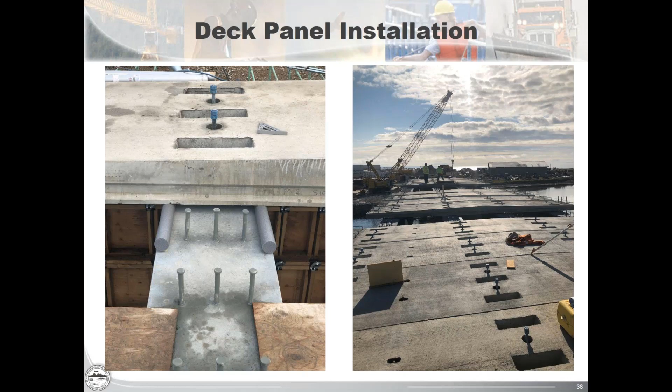Great answer. A couple minutes left, so I'll wind down here. Couple more questions. Were the bridge railings cast in place? They were, yeah. So those curbs are sort of the last item that is cast in place, and the rails were normally assembled on.

So this portion is cast in place on top, and that helps if there's any unevenness in the panels, to make sure that the railing and the curb end up with a nice true line that you see as you're driving across it.

Okay, got the time, probably one or two more questions. I saw you were able to control the air temperature during concrete placement. What about the temperature of the surrounding ground?

Yeah, so generally there's also a requirement in the contract that the ground be brought up to temperature as well, same thing with the forms and the rebar, so you can't place warm concrete into a frozen form with frozen rebar and ice crystals. And ironically, sometimes the problem is we heat the ground too much, and since it's all based on permafrost and ice, we can unintentionally thaw that ground everything's sitting on. So putting heat into there, but not so much that you start to cause adverse problems, is important.

Okay, and last but not least, not actually a question, just says, great job, beautiful work.